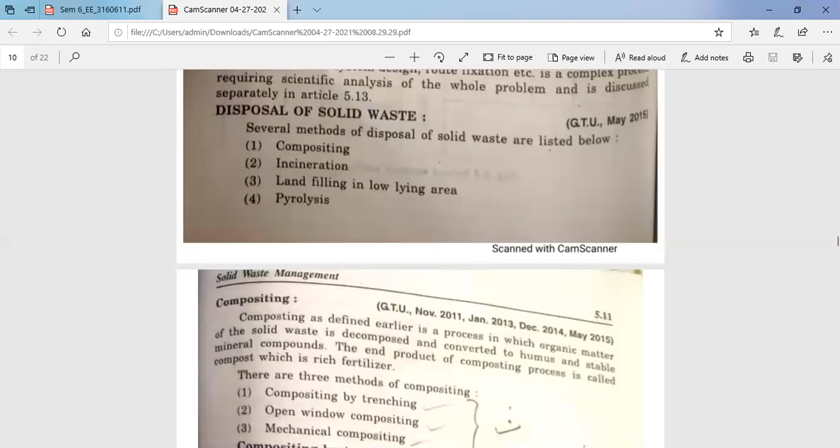Okay, so next topic is this disposal of solid waste, starting with our composting.

Composting, as defined earlier, is a process in which organic matter of the solid waste is decomposed and converted to humus and stable mineral compounds. The end product of composting process is called compost, which is a rich fertilizer.

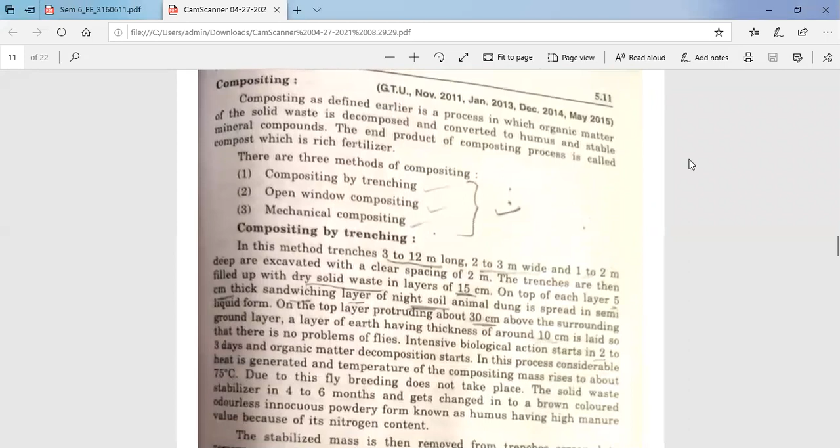There are three methods of composting: composting by trenching, open window composting, and mechanical composting.

Composting by trenching: in this method, trenches 3 to 12 meters long, 2 to 3 meters wide, and 1 to 2 meters deep are excavated with a clear spacing of 2 meters.

The trenches are then filled up with dry solid waste in layers of 15 centimeters. On top of each layer, a 5 centimeter thick sandwiching layer of night soil or animal dung is spread in a semi-liquid form on the top layer, protruding about 30 centimeters above the surrounding ground layer.

A layer of earth having thickness of around 10 centimeters is laid so that there is no problem of flies. Intensive biological action starts in 2 to 3 days and organic matter decomposition begins.

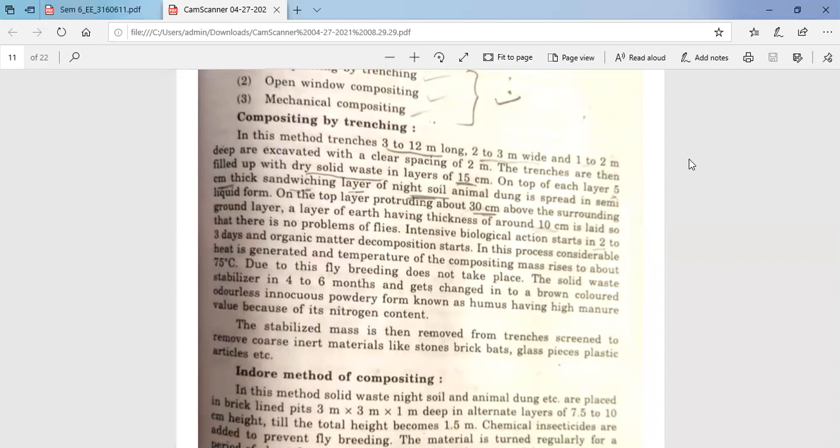In this process, considerable heat is generated and the temperature of the composting mass rises to about 75 degrees Celsius. Due to this, fly breeding does not take place.

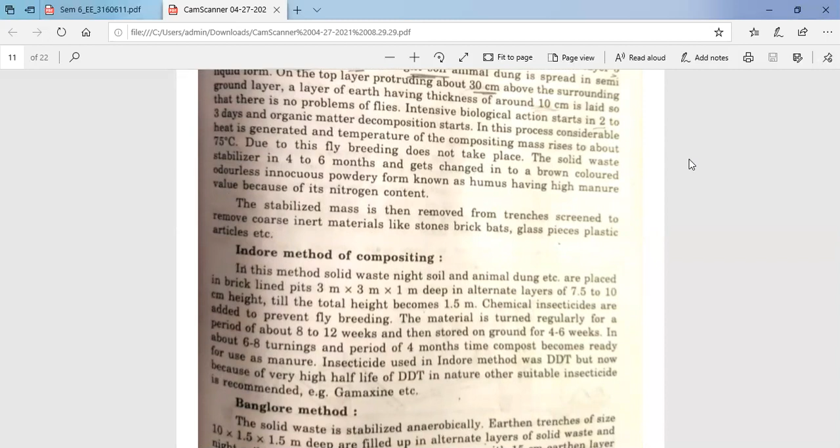The solid waste stabilizes in 4 to 6 months and gets changed into a brown colored, odorless, innocuous, powdery form known as humus, having a high manure value because of its nitrogen content.

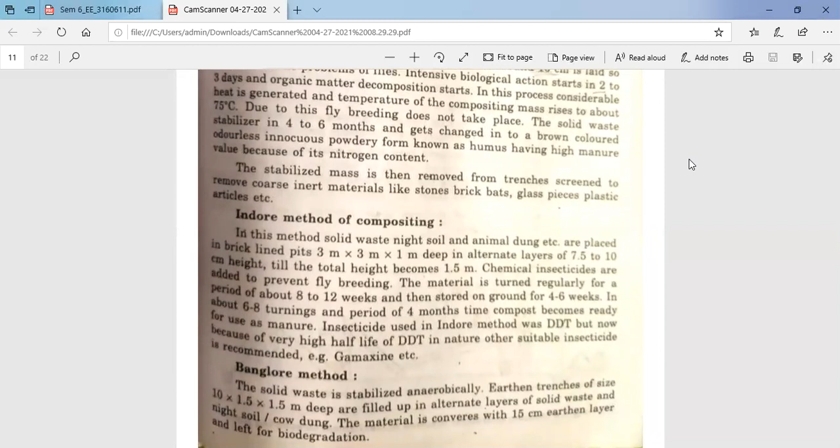The stabilized mass is then removed from the trenches and screened to remove coarse inert materials like stones, brick bats, glass pieces, plastic articles, etc.

Indore method of composting: in this method, solid waste, night soil, and animal dung, etc. are placed in a brick lined pit about 3 by 3 by 1 meter deep in alternate layers of 7.5 to 10 centimeter height.

This continues till the total height becomes 1.5 meters. Chemical insecticides are added to prevent fly breeding. The material is turned regularly for a period of about 8 to 12 weeks.

It is then stored on the ground for 4 to 6 weeks. So in about 6 to 8 turnings and a period of 4 months time, compost becomes ready for use as a manure.

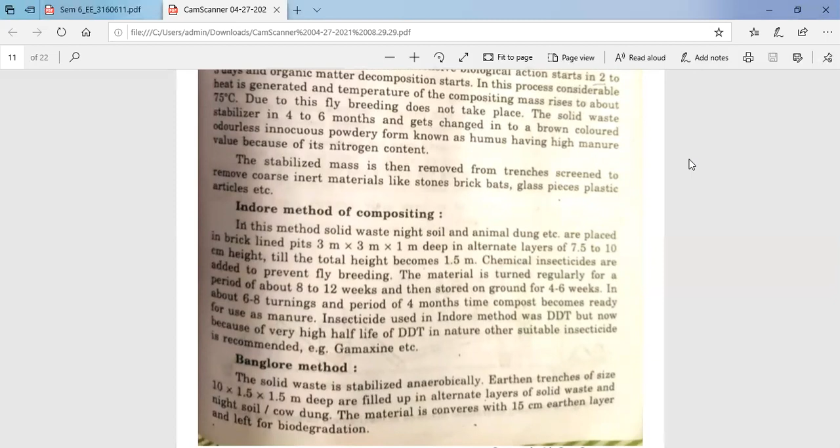The insecticide used in the Indore method was DDT, but now because of its very high persistence in nature, other suitable insecticides are recommended, for example Gamaxine, etc. Next is the Bangalore method.

In the Bangalore method, the solid waste is stabilized anaerobically. Earthen trenches of size 10 by 1.5 by 1.5 meters deep are filled with alternate layers of solid waste and night soil or cow dung.

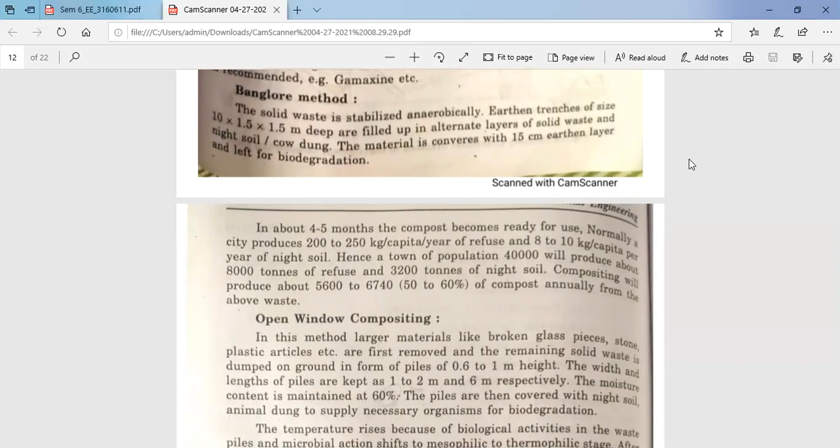The material is covered with 15 centimeter earthen layers and left for biodegradation. In about 4 to 5 months, the compost becomes ready for use.

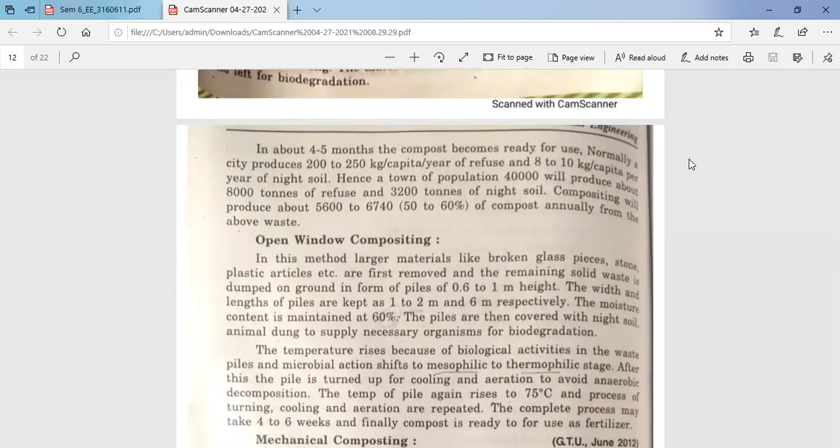Normally a city produces 200 to 250 kg per capita per year of refuse and 8 to 10 kg per capita per year of night soil.

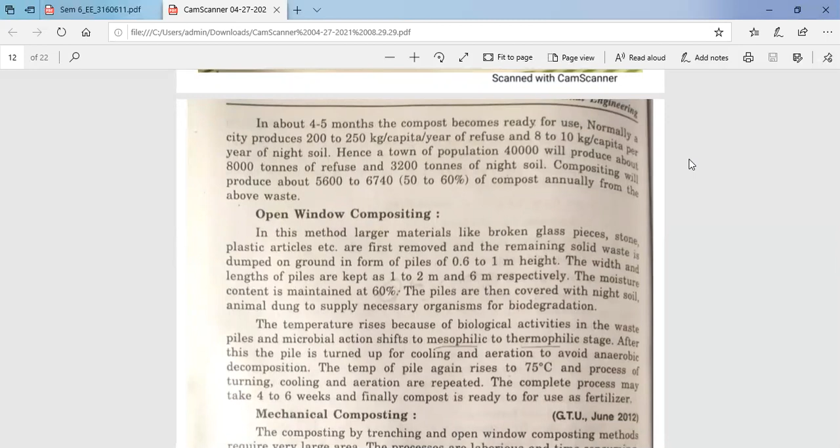Hence a town of population 40,000 will produce about 8,000 tons of refuse and 3,200 tons of night soil. Composting will produce about 5,600 to 6,740 tons of compost annually from the above waste.

Next is open window composting. In this method, large materials like broken glass pieces, stones, plastic articles, etc. are first removed.

The remaining solid waste is then dumped on the ground in the form of piles about 0.6 to 1 meter high. The width and length of the piles are taken as 1 to 2 meters and 6 meters respectively.

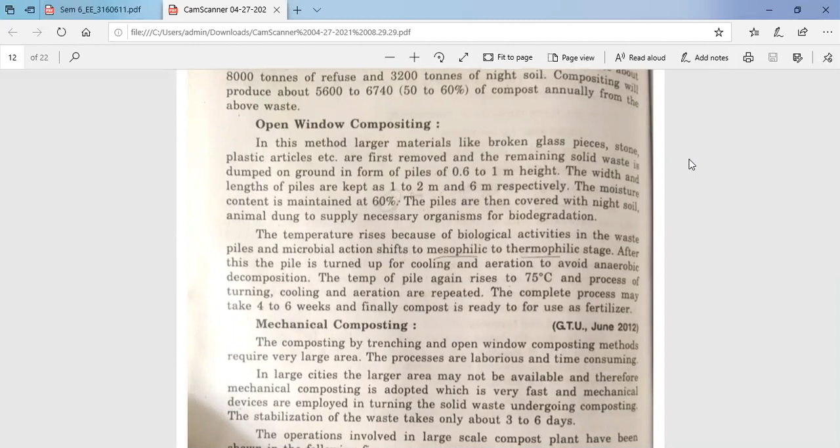The moisture content is maintained at 60%. The piles are then covered with night soil and animal dung to supply the necessary organisms for biodegradation.

The temperature rises because of biological activities in the waste piles, and the microbial action shifts to mesophilic to thermophilic stage. After this, the pile is turned for cooling and aeration to avoid anaerobic decomposition.

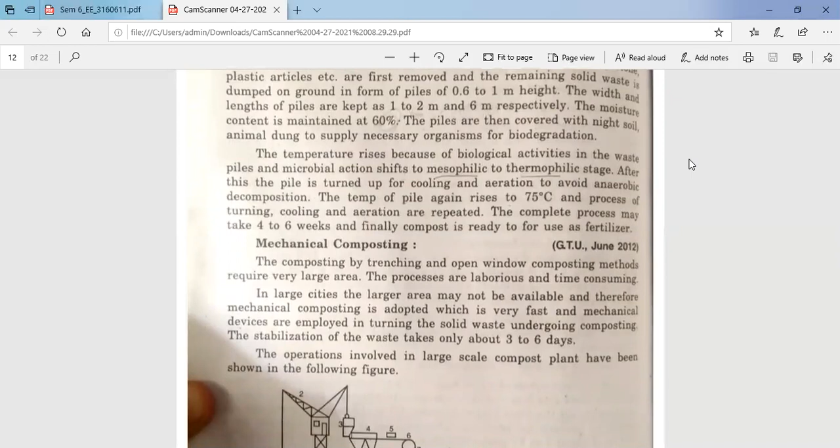The temperature of the pile again rises to 75 degrees Celsius, and the process of turning, cooling, and aeration is repeated. The complete process may take 4 to 6 weeks, and finally the compost is ready for use as a fertilizer.

Next is mechanical composting. Composting by trenching and open window composting methods require very large areas, and the processes are laborious and time consuming. So in large cities where larger areas may not be available, mechanical composting is adopted, which is very fast, and mechanical devices are employed in turning the solid waste undergoing composting. Stabilization of the waste takes only about 3 to 6 days.

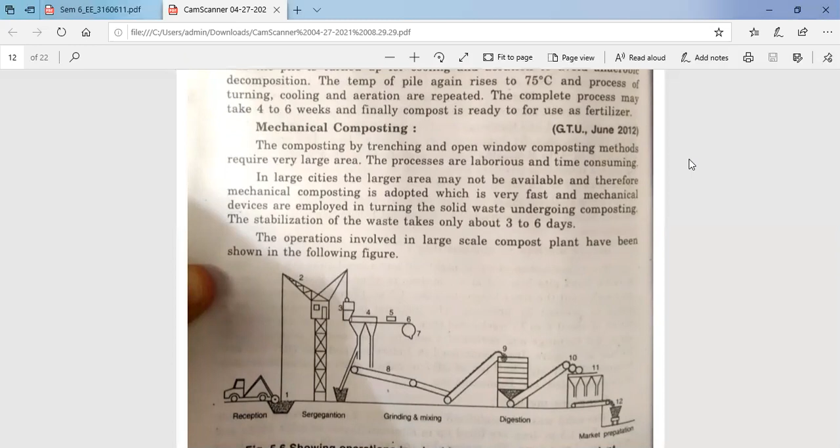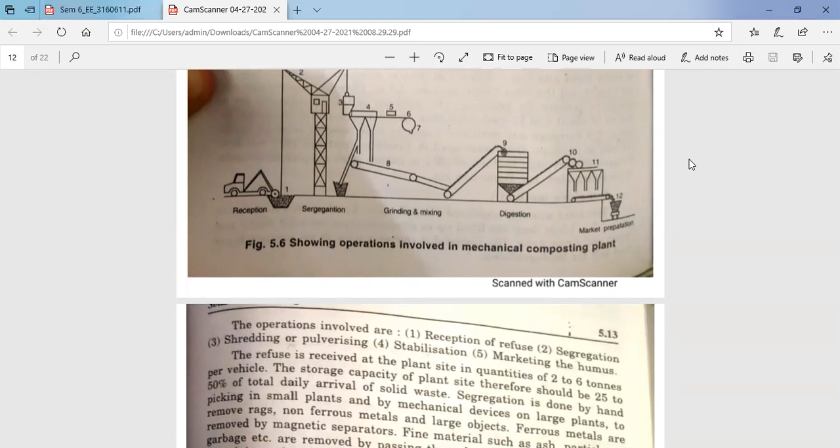The operations involved in a large scale compost plant are shown in the figure. This operation involves: first, reception of the refuse; second, segregation; third, shredding or pulverizing; fourth, stabilization; and fifth, marketing the humus.

The refuse is received at the plant site in quantities of 2 to 6 tons per vehicle. Storage capacity of the plant site therefore should be 25 to 50% of the total daily arrival of solid waste.

Segregation is done by hand picking in small plants and by mechanical devices in larger plants to remove rags, non-ferrous metals and large objects. Ferrous metals are removed by magnetic separators. Fine materials such as ash and particles of garbage are removed by passing the refuse over the shaker screen. The remaining refuse is then shredded and pulverized mechanically.

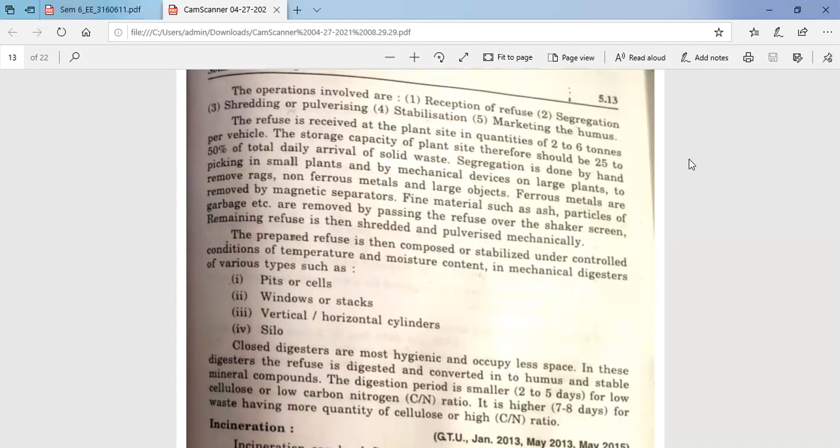The prepared refuse is then composted and stabilized under controlled conditions of temperature and moisture content in mechanical digesters of various types, such as pits or cells, windrows or stacks, vertical or horizontal cylinders, and silos. Closed digesters are most hygienic and occupy less space. In these digesters, the refuse is digested and converted into humus and stable mineral compounds.

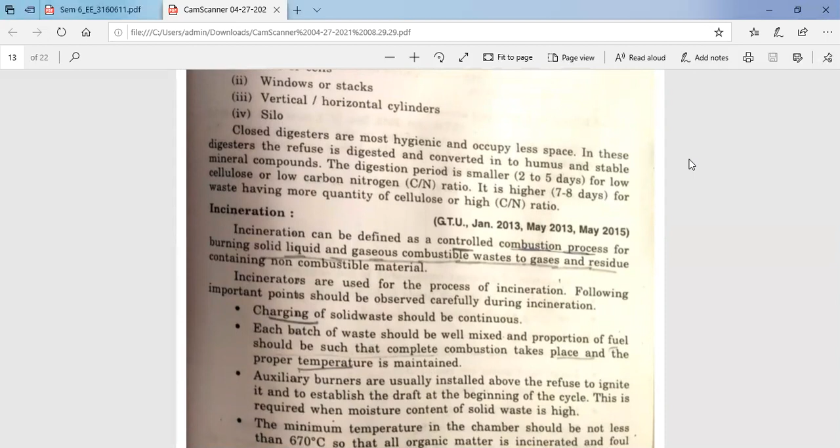The digestion period is smaller, about 2 to 5 days, for low cellulose or low carbon-nitrogen ratio waste. It is higher, about 7 to 8 days, for waste having a higher quantity of cellulose or high C by N ratio.

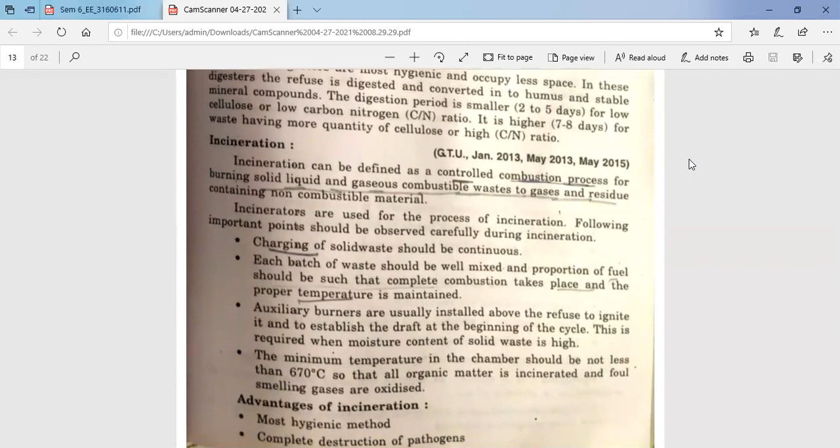Incineration can be defined as a controlled combustion process for burning solid, liquid, and gaseous combustible wastes into gases and residues containing non-combustible material. Incinerators are used for the process of incineration. The following important points should be observed carefully during incineration.

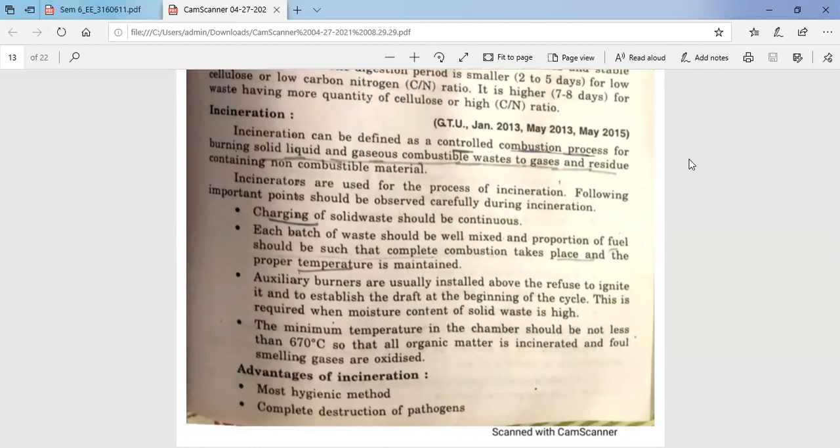First, the charging of solid waste should be continuous. Each batch of waste should be well mixed and proportions of fuel should be such that complete combustion takes place and the proper temperature is maintained. Auxiliary burners are usually installed above the refuse to ignite it and establish the draft at the beginning of the cycle. This is required when the moisture content of the solid waste is very high.

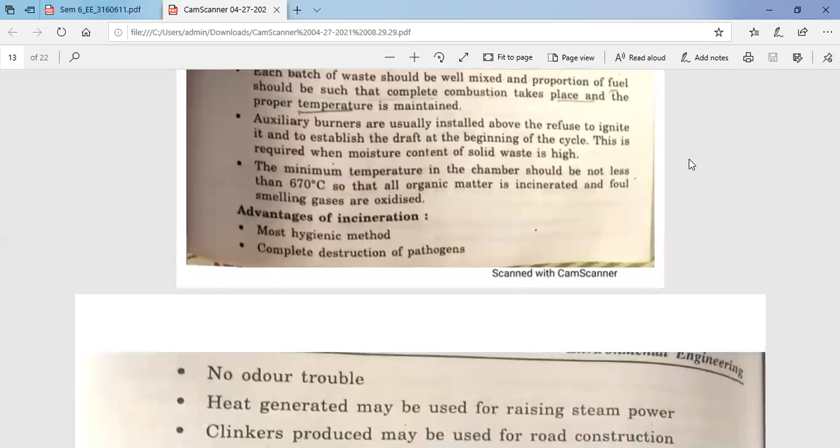The minimum temperature in the chamber should not be less than 670 degrees Celsius so that all the organic matter is incinerated and foul smelling gases are oxidized.

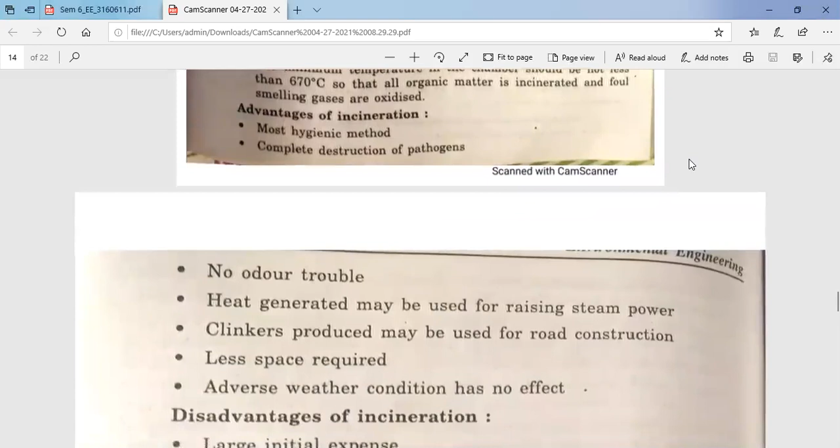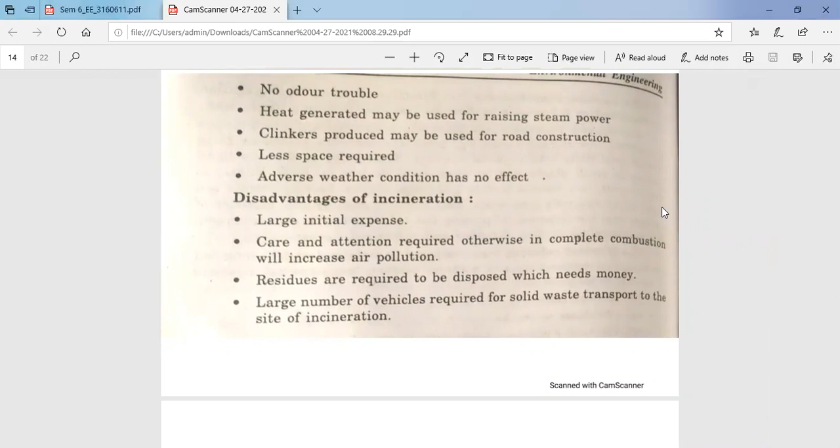The advantages are: it's the most hygienic method, with complete destruction of pathogens and no odour trouble. The heat generated may be used for raising steam power, clinkers produced may be used for road construction, less space is required, and adverse weather conditions have no effect.

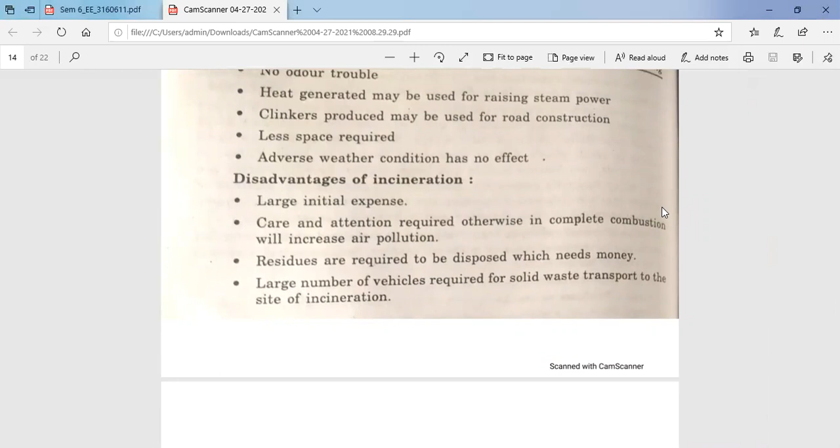There are also disadvantages: large initial expense, care and attention required, otherwise incomplete combustion will increase air pollution. Residues are required to be disposed of which needs money, and a large number of vehicles are required for solid waste transport to the site of incineration.

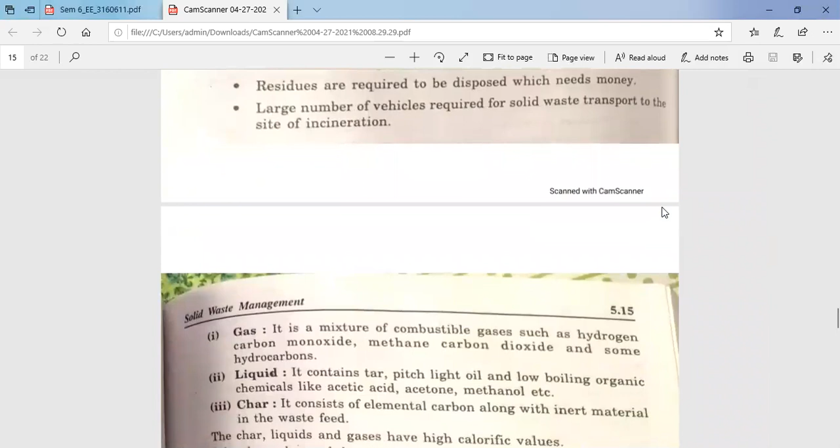Next is the type of collection system. The collection system is classified into two categories based on the mode of operation: the hauled container system and second, the stationary container system.

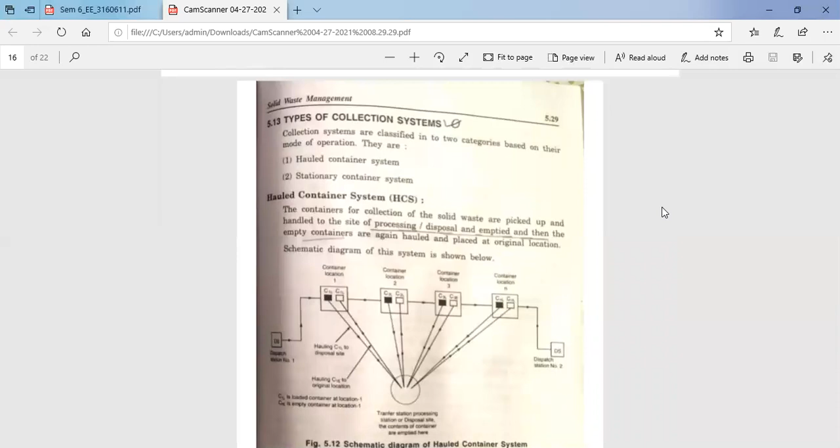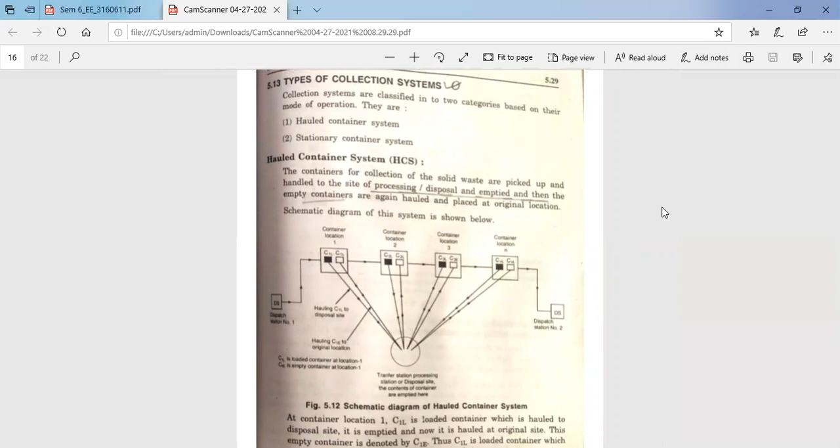The hauled container system is known as HCS. The containers collecting solid waste are picked up and hauled to the site of processing or disposal and emptied, and then the empty containers are again hauled and placed at the original location. The schematic diagram of the system is shown in the figure.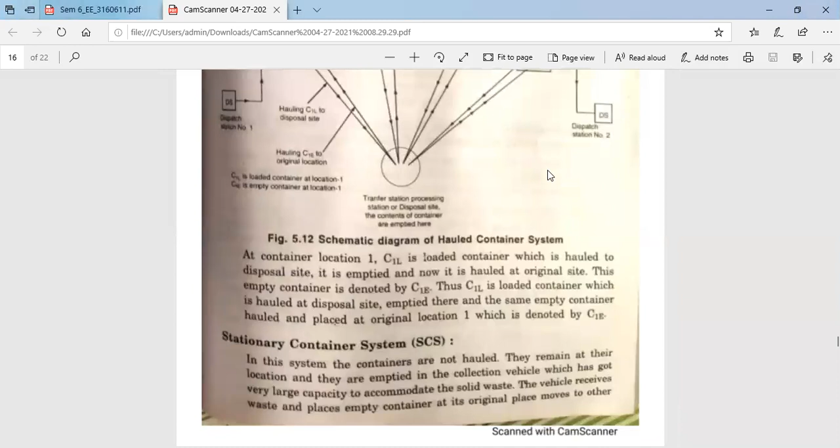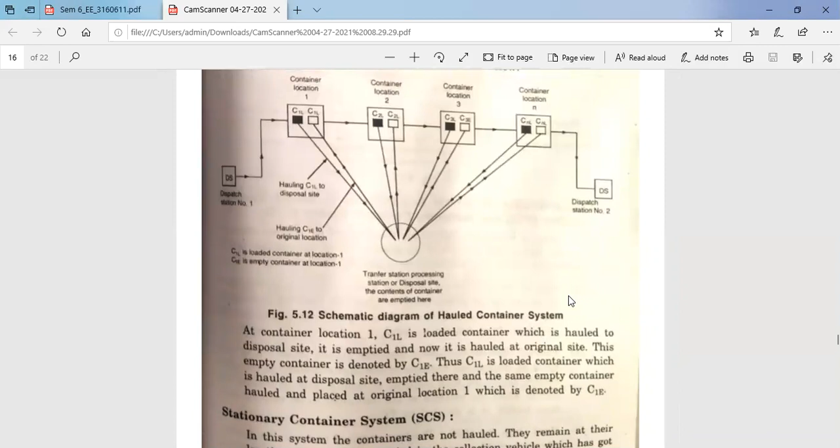At container location 1, C1L is the loaded container, which is hauled to the disposal site. It is emptied there, and now it is hauled back to the original site. This empty container is denoted by C1E. Thus, C1L is a loaded container which is hauled to the disposal site, emptied there, and the same empty container is hauled and placed at the origin location 1, denoted by C1E.

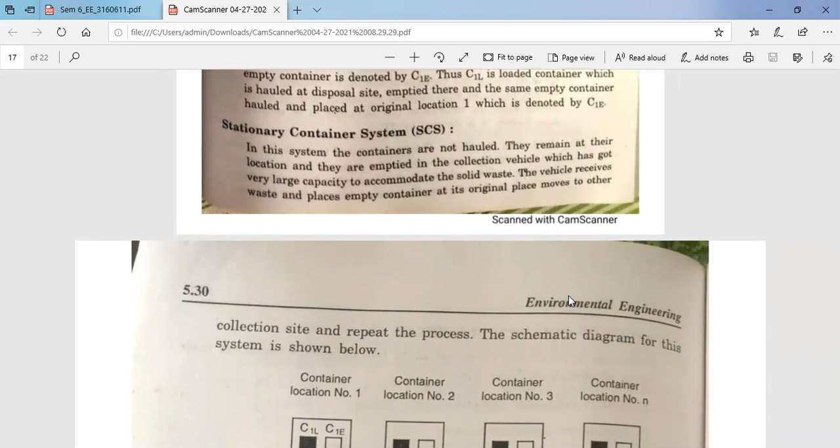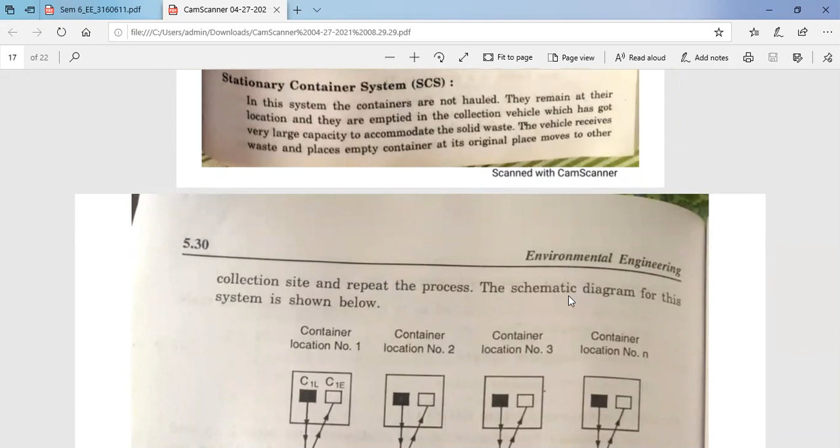Next is the stationary container system, known as SCS. In this system, the containers are not hauled; they remain at their location and are emptied into the collection vehicle, which has a very large capacity to accommodate the solid waste. The vehicle receives the waste and places the empty container back at its original place, then moves to the other collection site and repeats the process. The schematic diagram for the system is shown in the figure.

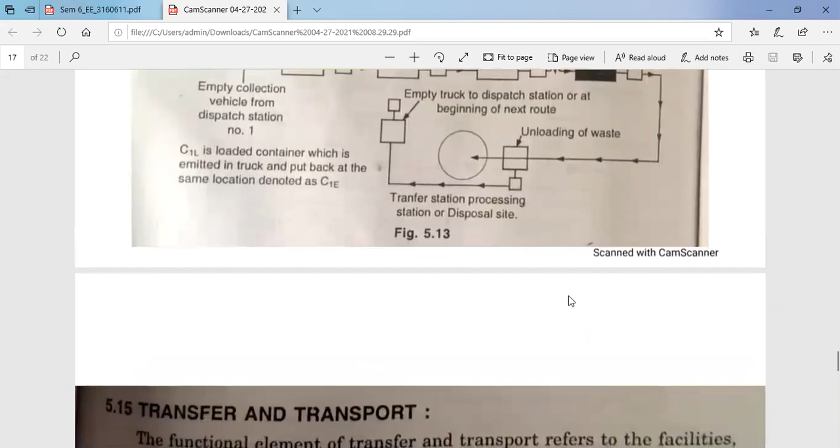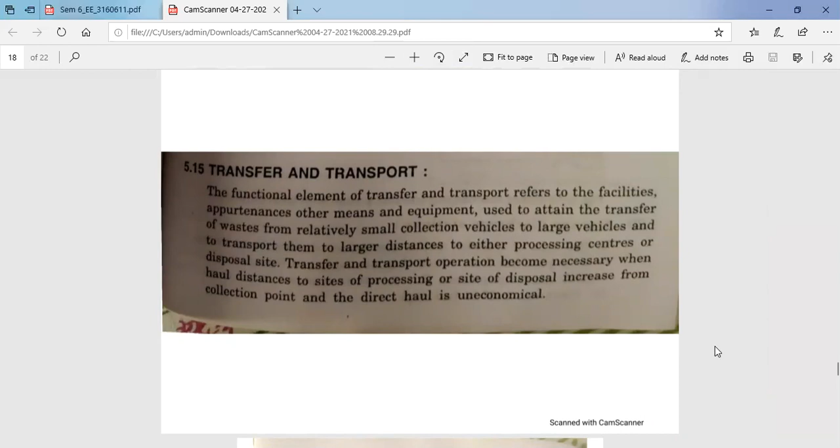Next is transfer and transport. The functional element of transfer and transport refers to the facilities, equipment, and other means used to attain transfer of waste from relatively small collection vehicles to larger vehicles, and to transport them over large distances to either processing centers or disposal sites.

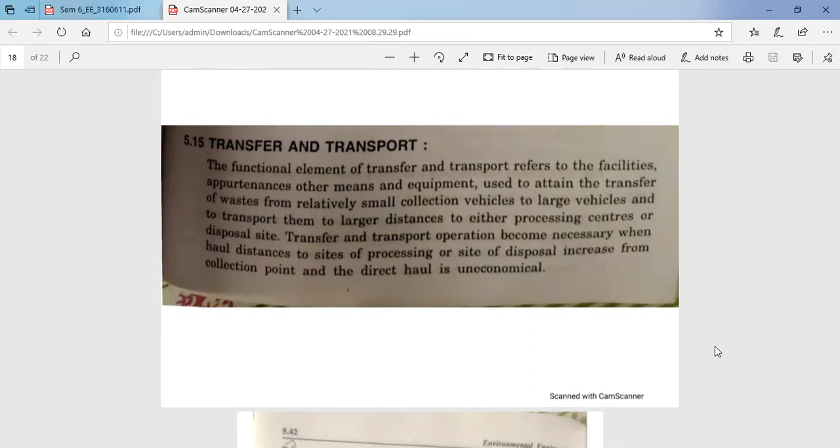Transfer and transport operations become necessary when the haul distances to the processing or disposal sites increase from the collection point, making direct haul uneconomical.

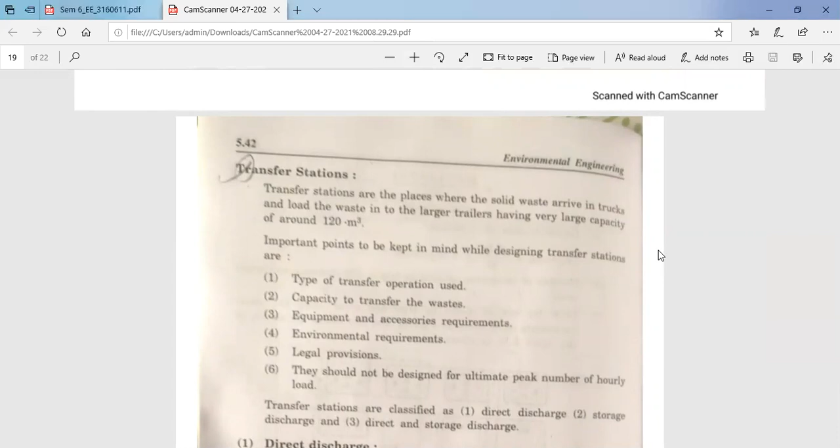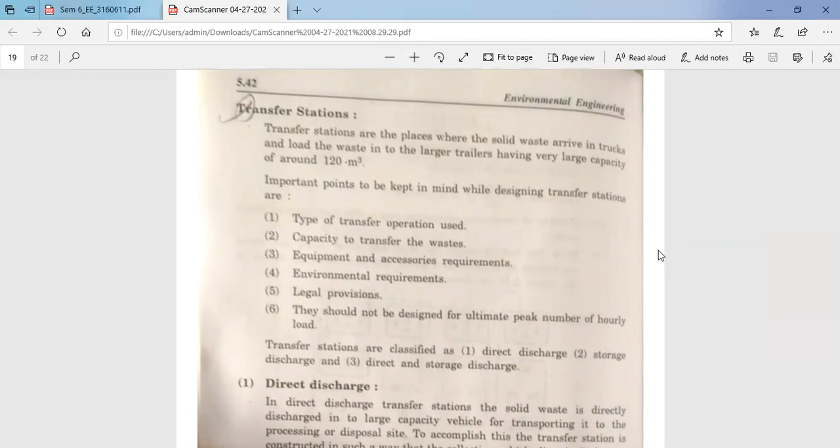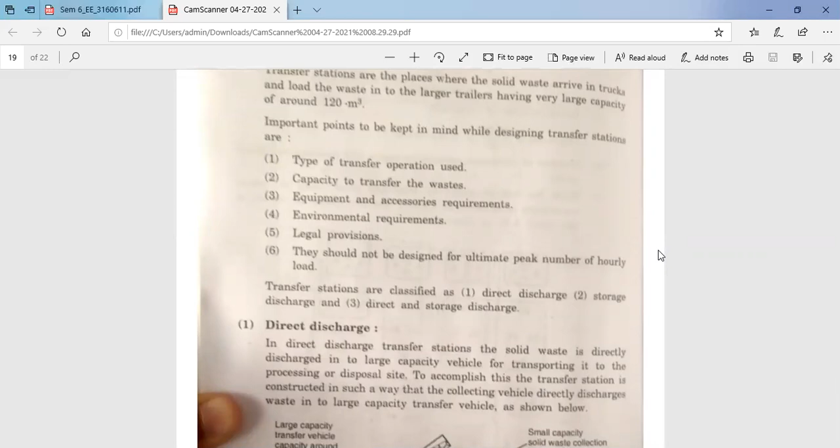Transfer stations are the places where solid waste arrives in trucks and is loaded into larger trailers having a capacity of around 120 meter cube. Important points to keep in mind while designing transfer stations are the type of transfer operations used, capacities to transfer the waste, equipment and accessories requirements, environmental requirements, and legal provisions. They should not be designed for the ultimate peak number of hourly loads.

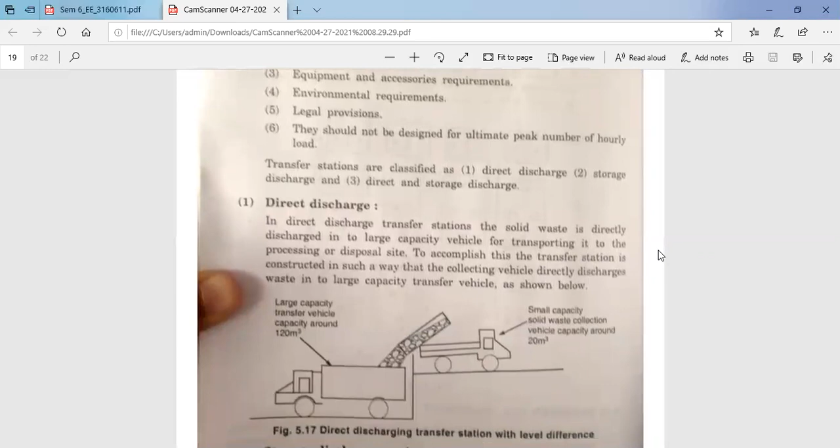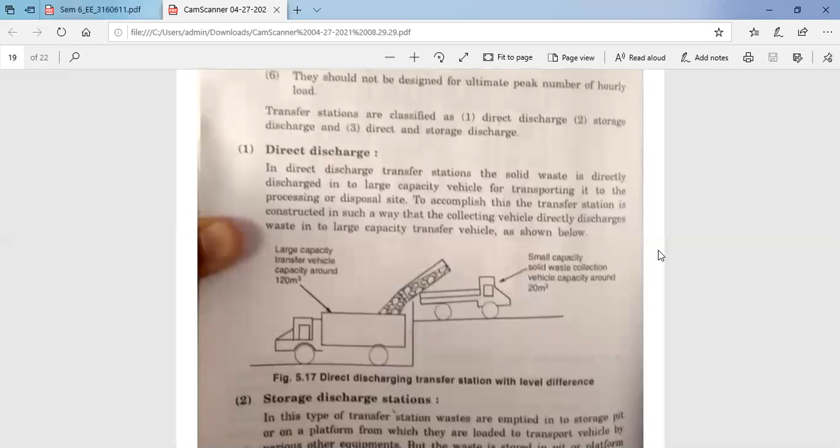Transfer stations are classified as direct discharge, storage discharge, and combined direct and storage discharge. In direct discharge transfer stations, solid waste is directly discharged into large capacity vehicles for transporting it to the processing or disposal site. The station is constructed so that the collecting vehicle directly discharges waste into the large capacity transfer vehicle, as shown in the figure.

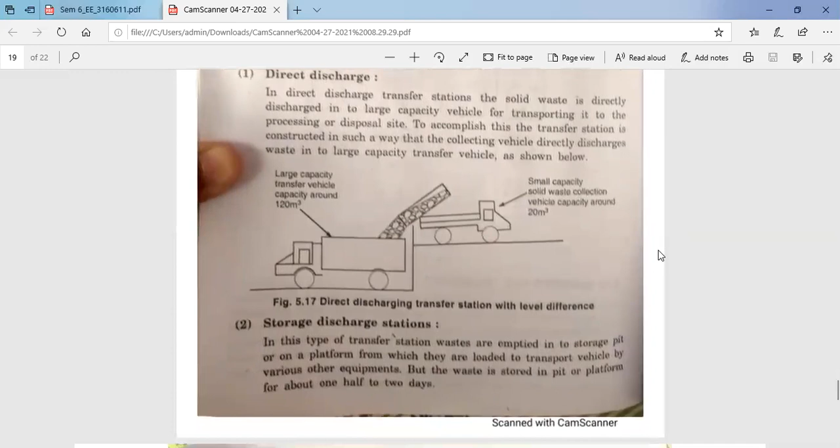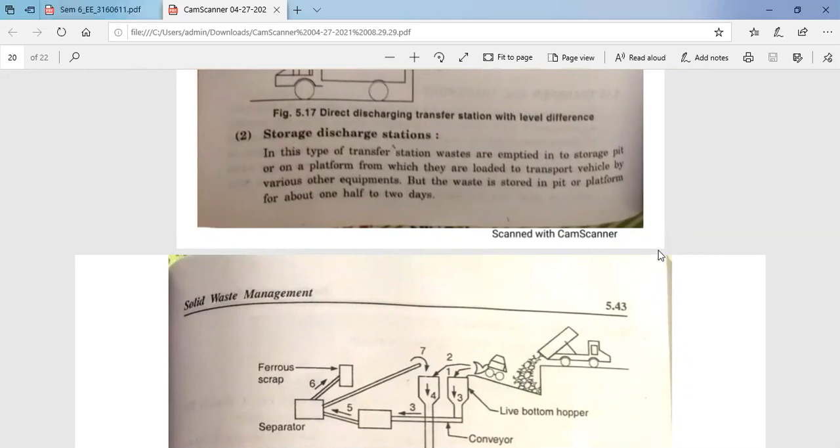Second is the storage discharge station. In this type, waste is emptied into a storage pit or onto a platform, from which it is loaded onto the transport vehicle by various other equipment. The waste is stored in the pit or platform for about 0.5 to 2 days.

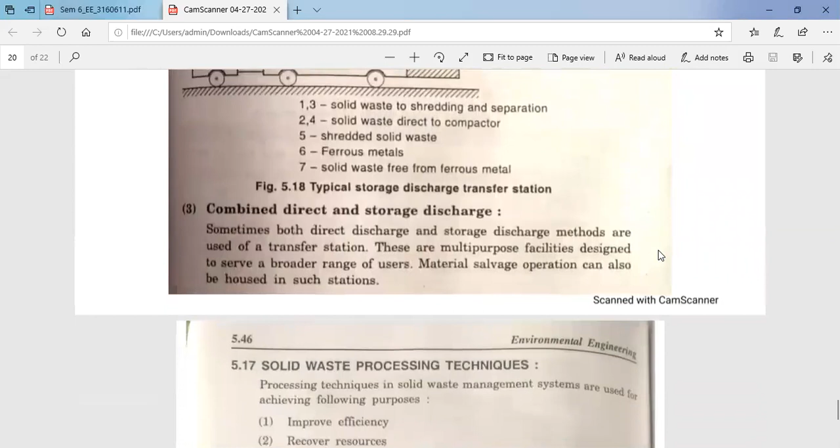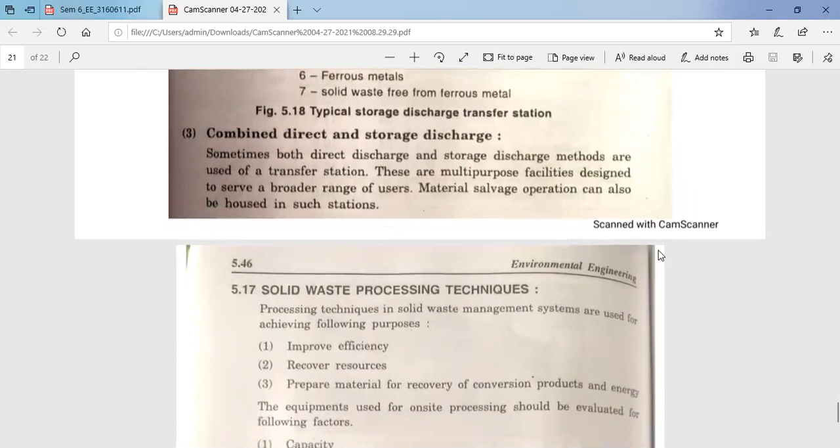Third is the combined direct and storage discharge, where sometimes both direct discharge and storage discharge methods are used at a transfer station. These are multi-purpose facilities designed to serve a broader range of users, and material salvage operations can also be housed in such stations.

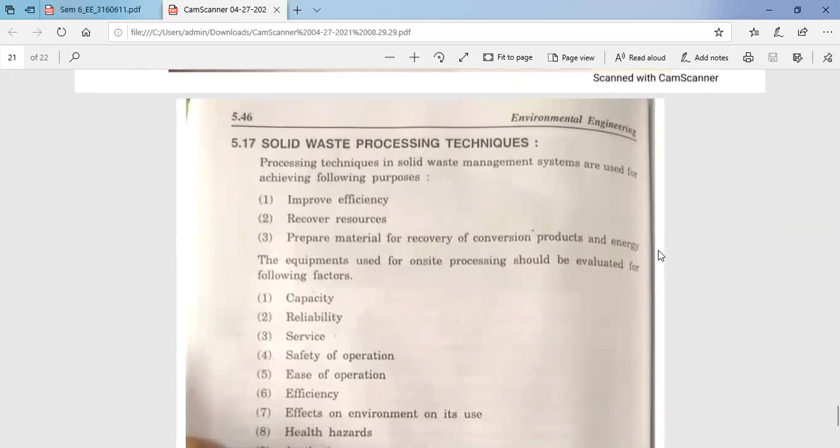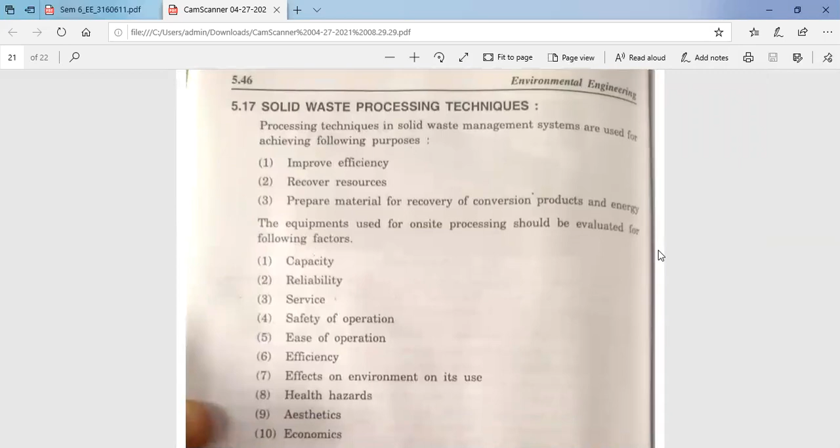The last topic is solid waste processing techniques. These techniques are used for achieving the following purposes: improving efficiency, recovering resources, and preparing materials for the recovery of conversion products and energy.

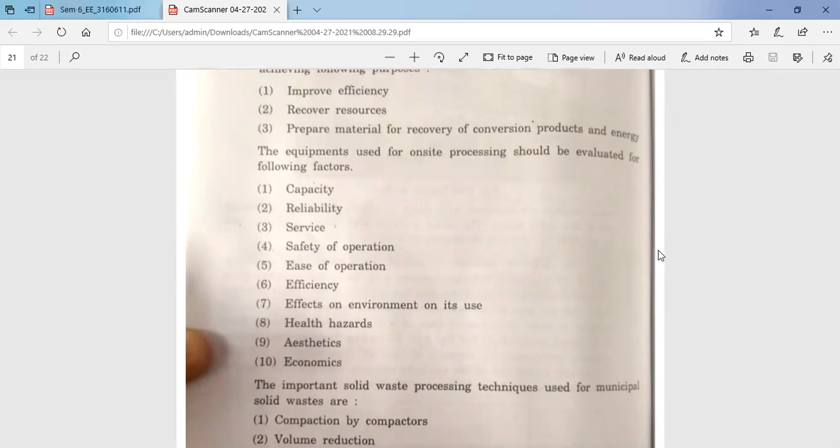The equipment used for on-site processing should be evaluated for the following factors: capacity, reliability, service, safety of operation, efficiency, effects on the environment, health hazards, aesthetics, and economics.

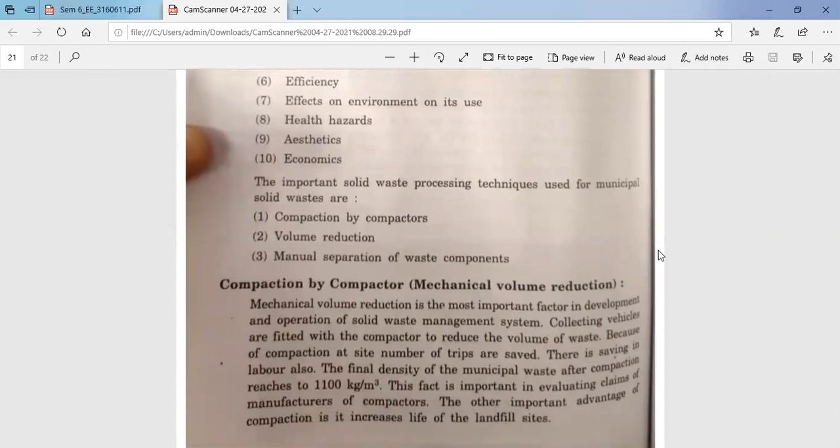The important solid waste processing techniques used for municipal solid waste are compaction by compactors, volume reduction, and manual separation of waste components. First, compaction by compactor.

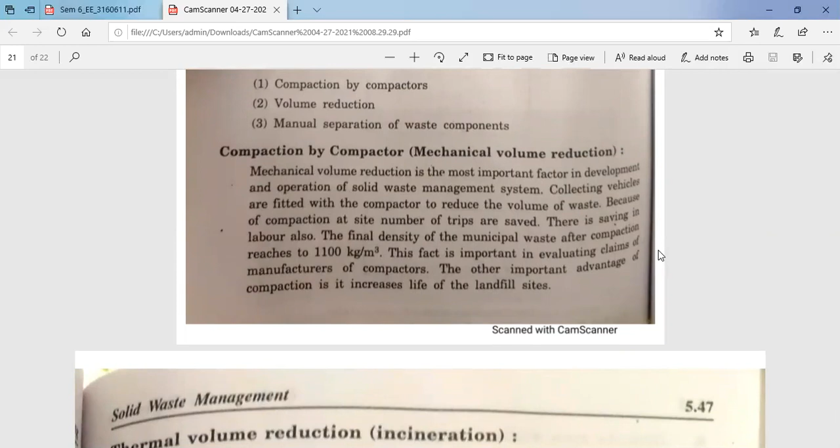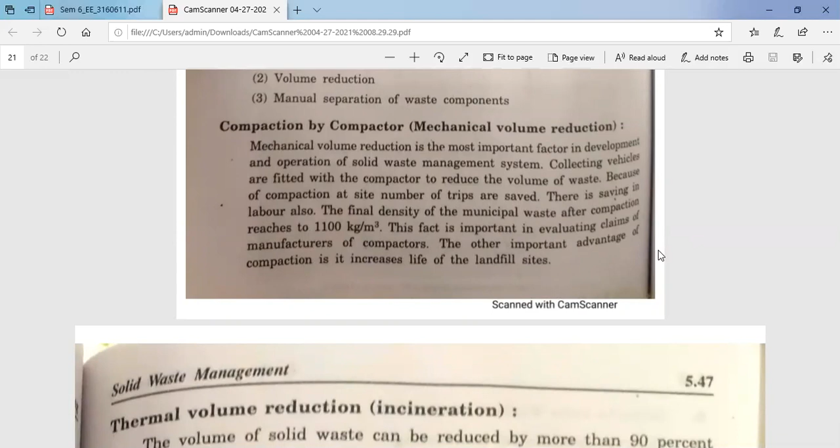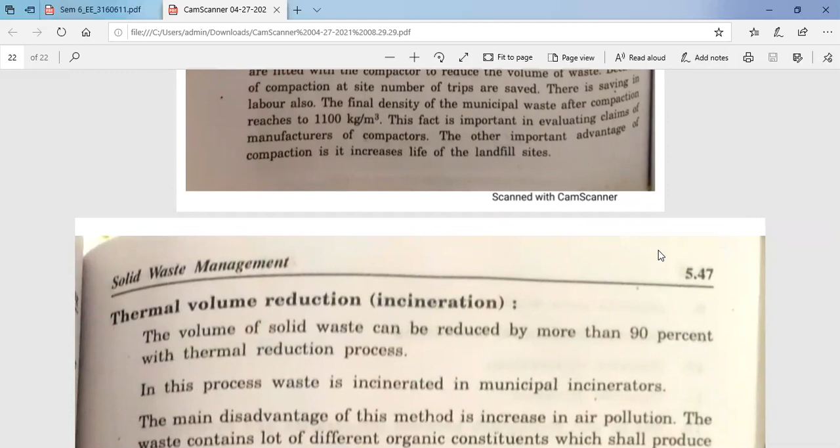Mechanical volume reduction is the most important factor in development and operation of a solid waste management system. Collecting vehicles are fitted with compactors to reduce the volume of waste. Because of compaction on site, the number of trips is reduced, saving labor as well. The final density of municipal waste after compaction reaches 1100 kg per meter cube. This fact is important in evaluating manufacturer claims about compactors. Another important advantage of compaction is that it increases the life of landfill sites.

There is also thermal volume reduction, known as incineration. The volume of solid waste can be reduced by more than 90% with the thermal reduction process, where waste is incinerated in municipal incinerators. The disadvantage of this method is increased air pollution, since waste contains various organic constituents that produce different pollutant gases when incinerated. Because of this negative aspect, thermal volume reduction is not a widely accepted practice.

Now, manual component separation. This method should desirably be encouraged at the source of waste production. For example, residents should separately keep solid waste in different bins, with different containers for glass and ceramics, organic putrescible waste, paper, etc. The authority shall then collect the waste using collection vehicles.